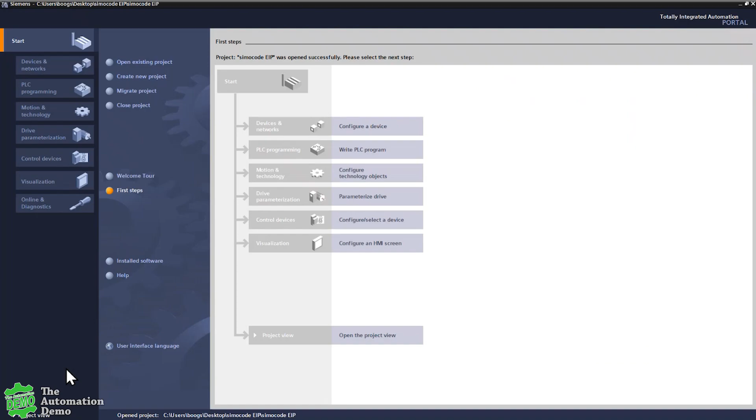This is TIA Portal, and this is the software that we program with. As I said in the previous presentation, the portal is my umbrella that covers all the programming aspects of PLCs, HMIs, and drives. I've already added a SIMOCODE into this project, but just to show how you add one, you go to New Device, and as I stated, here's your PLCs, your HMIs, your SCADA systems, your drives, and then here is my control devices.

The software, as we stated previous episode, is free for the basic. If you are not programming any of this other stuff, then this is what would show up. But if you're using our PLCs and you want to use SIMOCODE, this would be the little postage stamp for that. And then it will be under SIRIUS Monitoring Control Devices. And then here's the SIMOCODE Pro and the basic unit, because that's what we will talk to. And then here's all the communication protocols that we have.

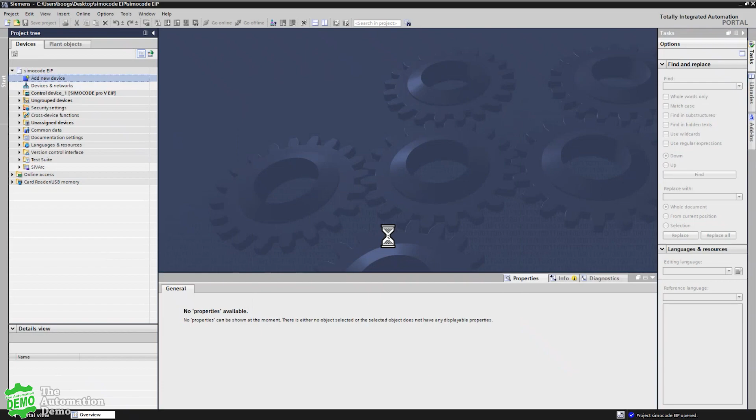For our demonstration right now, I'm going to use Ethernet IP. And I'm going to hit OK. And then what it's going to do is start a wizard for you. Because the SIMOCODE, yeah, it has some complexity to it. We want to make it easy for you. So what we do is initially out of the gate, we create or start a template startup screen. And we're going to do the parameter wizard.

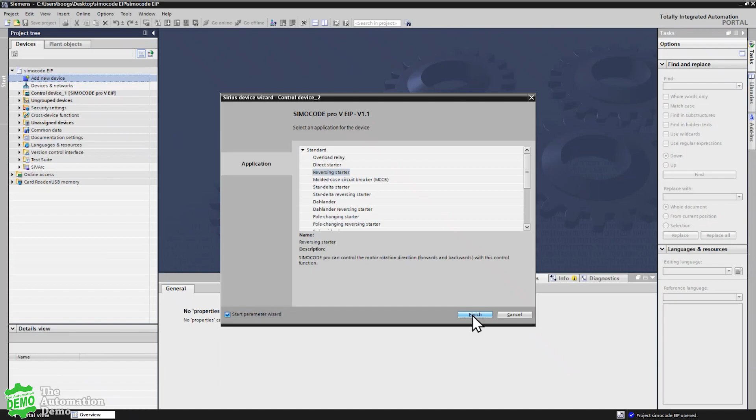And then it says, how do you want to apply it? How do you want to use it? Overload relay, direct starter, or reversing starter? So in my application, I'm going to do reversing starter. And I'm going to hit finish. And then now it just installed a template into the SIMOCODE of how you want to use it. And then here again, it says, are you sure you want to use it as reversing starter?

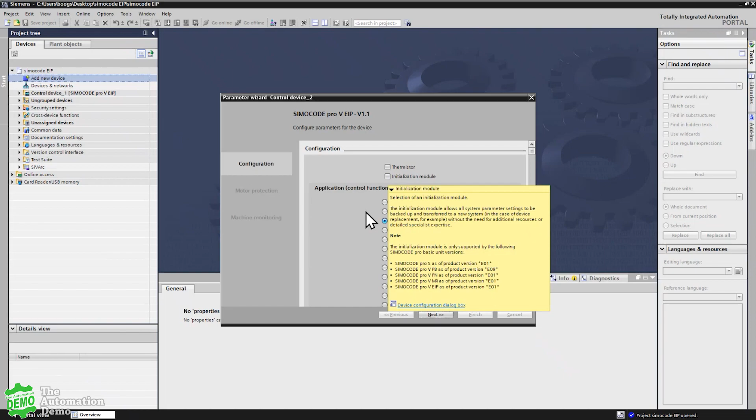And then it has some check boxes, thermistor, if you're going to use the thermistor in the windings. And then there's the initialization module that we talked about, one way of recovering or programming a new SIMOCODE that you swapped out. I'm going to hit next. Here's where I put in my full load amps of my motor. And for my application, it's 0.5 amp.

And then trip class 5, 20, see it goes all the way to 40. For my application, I'm going to go 20. And then cool down period. This is the time that you rest after an overload trip. I'm going to put in 60 seconds. That's the minimum. And then you can see here's an unbalanced protection and then a stalled rotor. But notice it's deactivated. All the settings that I talk about today are all deactivated, except the application that you've done is for an overload and using it as a reversing starter.

So I hit next. And then, as I stated in the previous episode, I have a way of doing high and low, and setting that up within the SIMOCODE to where it could stand alone by itself. So if you're using a SIMOCODE by itself in a pump panel and you want to have a high and low process window, this has nothing to do with the overload, but a process window for pressure, and we bring it in as a 4 to 20 milliamp pressure, then I can set this up as a process window.

And you're able to control and give signals to let them know if it overpressures or underpressures, like for instance, my friend where his pivot broke and a flange or a coupler broke and was spraying water everywhere. So the demand for the pump went extremely high, but the load went away. So I was able to shut it off before it flooded his fields and so forth.

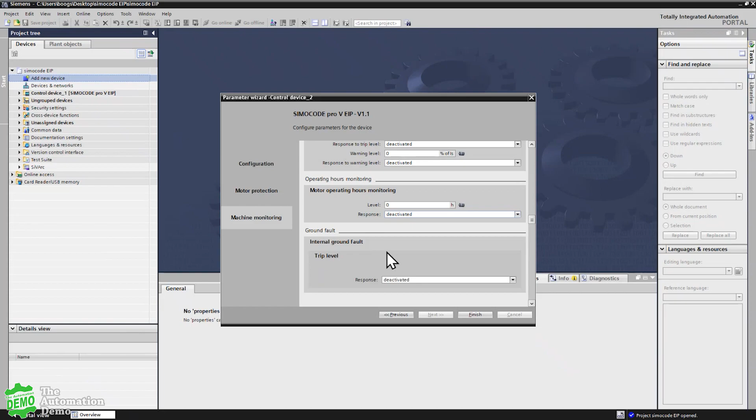And then we have some other options here where you have motor operating hours. So you can go in here and put in 600 hours, and then you can send a signal to the operator and say, hey, once the motor has run accumulatively 600 hours, signal him, and then he can fill out a PM and schedule it down or let the maintenance department know that the motor has run for 600 hours. And that's a way of doing your PMs on motors instead of like a calendar or anything like that. But we're not going to do that today. But notice it's deactivated and it's waiting there for you if you'd like to use it. Then I'm going to hit finish.

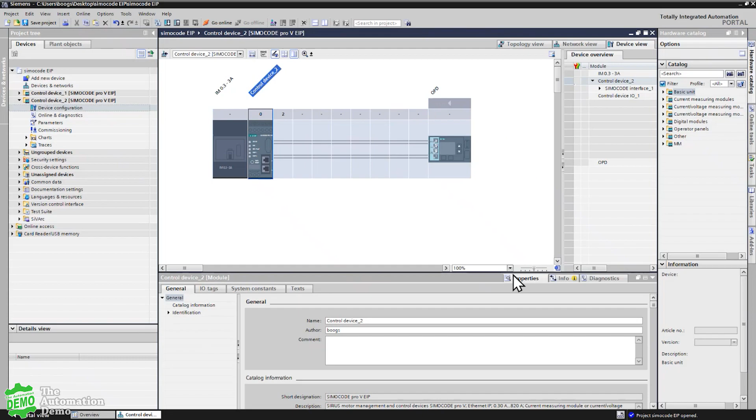Now what it's done is we're practically finished and using it. But when it adds it to the project tree here, I'm going to go to device configuration because we haven't told it what it all can do. It does a bare minimum of doing a current draw. And let me zoom in a little bit. So right now we only have a CT. But let's say our customer wants to monitor voltage and current.

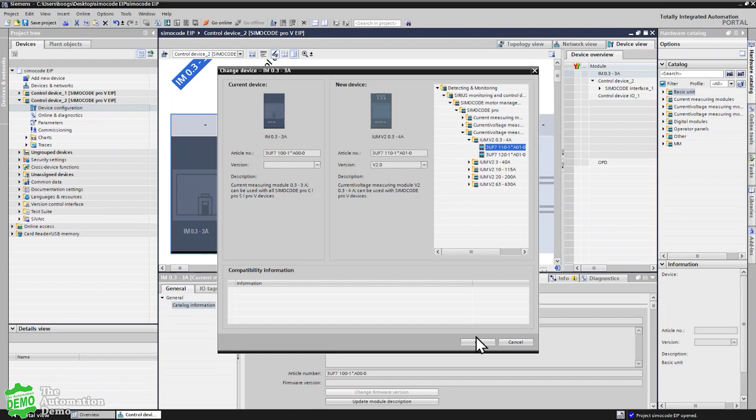So I'm going to change the device, and I'm going to change it to a CT PT so that it monitors current and voltage, and hit OK. And notice that the 0.3 to 4 amp on this one's just 0.3 to 3 amps. We'll switch that out. And now you have L1, L2, and L3 for monitoring voltage. You have the EtherNet/IP SIMOCODE.

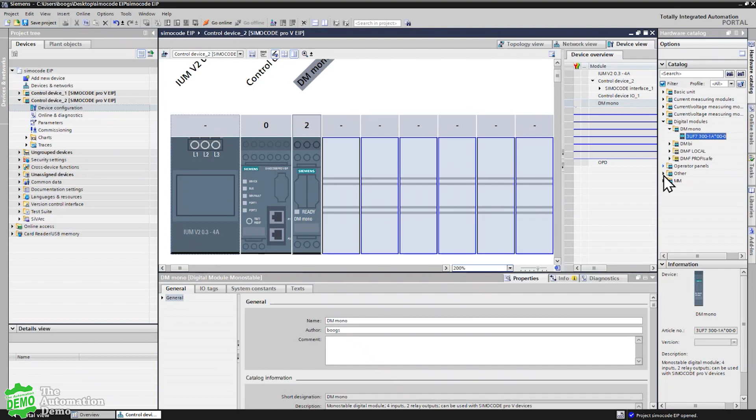And then in my demo that I'll show in just a minute, we're going to have a digital module. I stated that some plants use 120 volt control, and that's where we would use this digital module, because the base unit only has 24 volt DC inputs, but this one has 120 volt AC inputs. And then I'm going to put in an analog module and put in a temperature module. So now I've built up my demo that I have here on the desk.

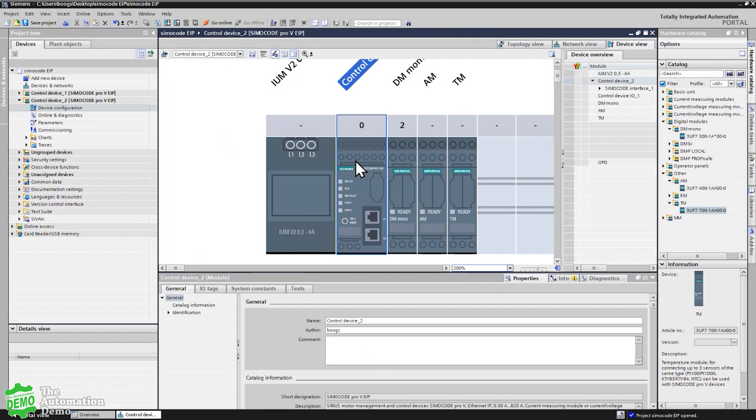I have the operator panel. If you don't, it's not required. If you're not going to use it, you can just delete it. Or if you want to leave it there, you can use it. That's great. So the last thing I need to do, because I've already got it configured as a full voltage reversing, I'm going to come to parameters again. And note, for those who've used Portal, the same icons, the same terminology, and the same look and feel as our drives. This is what the icons are for our G120 series or our S120 series.

I'm going to come over here and go to Ethernet parameters. I'm going to put in 20. If you remember, when I did the configuration in Studio 5000, I used 192.168.1.20. And then I'm going to scroll down and I'm going to turn on the web server. The web server meaning the web page for the SIMOCODE.

Now there's one big difference between the EtherNet/IP and the Profinet, Sean. The Profinet one has an OPC UA server built in. The EtherNet/IP does not. That's the big difference. But the setup and configuration of the EtherNet/IP version or the Profinet version is exactly the same. The only things that really change are that there's no OPC UA server here, and also the communication protocol.

So now, you asked me about the bits and the bytes in the logic. So if you look here, this is where it comes into the logic. With Siemens, we call it cyclic data, where it's cyclically sending and updating the process image. And then we have acyclic data. And correct me if I'm wrong on my terminology, Sean, but for Allen Bradley, that would be implicit and explicit data. So this is the implicit data that's coming into the Rockwell.

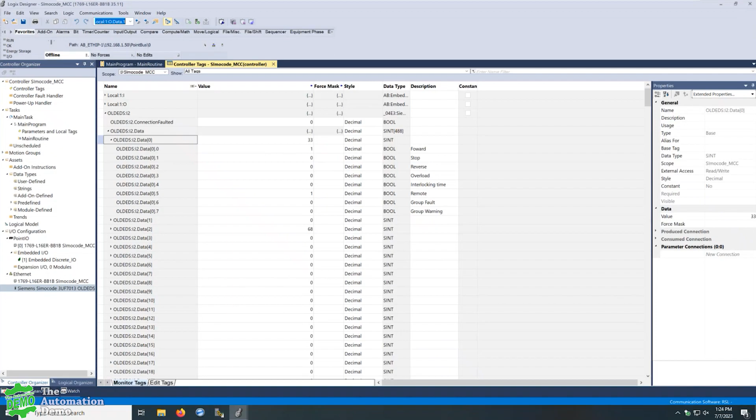So bit 0, that's status clockwise or counterclockwise. Bit 1 is off, bit 2 is counterclockwise. So if I switch back to the Rockwell software, you can see bit 0, there's forward, stop here, and notice that it's byte 0. And then here's reverse, and then I continue to do remote, ground fault, or group fault, and group warning, which is coinciding with this here. Okay, so with that done, that's the setup. You download it to the SIMOCODE, and we're off to the races.

Now, what I want to show next is how we go about turning it on and off. Mark, can you please do me a favor? Could you please check the IP address in Studio 5000? I'd be glad to. I believe it was 1.20 here. Yes, it was 1.20. Now this is the second one you added, though. That is correct. The one that is downloaded already is right here, and its parameters are the 1.20. Oh, I see. You were just adding a second one to show people how to go through the steps. Exactly. But the one we're actually using is the 1.20.

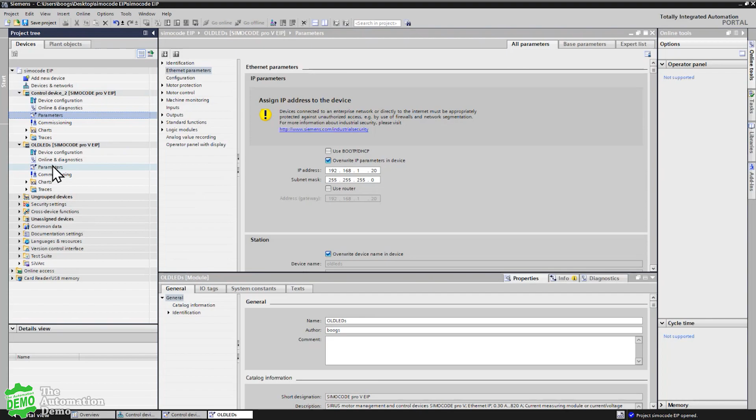Got it. Yep, this one up here, and I can change the name so it matches the one that I put in. So I can call that pump 203. Or the one that was in the Rockwell was old LEDs, like that, so I can have it match that. And now you can see it put it in alphabetical order and moved it down here. Okay, good. So the purpose here was to show you how to import it, but I've already done it here. I've already downloaded it to the demo that we're having.

So I'm going to switch over here to the Rockwell software. I'm going to go over here to the main program, the routine, and you can see up here that I have,

Can you zoom in on that? Thank you. Yep. For the old guys like me. Yep, I'm with you. I'm wearing my glasses as we speak.

So there we go. So I've got now the remote data, meaning is that I'm doing a local data. I've got a selector switch, and I'm going to put it in. So for our terminology today, remote means that the DCS or the PLC is in charge. And then local means that the demo is, or maybe a local stop start at an MCC bucket or a stop start station at the motor.

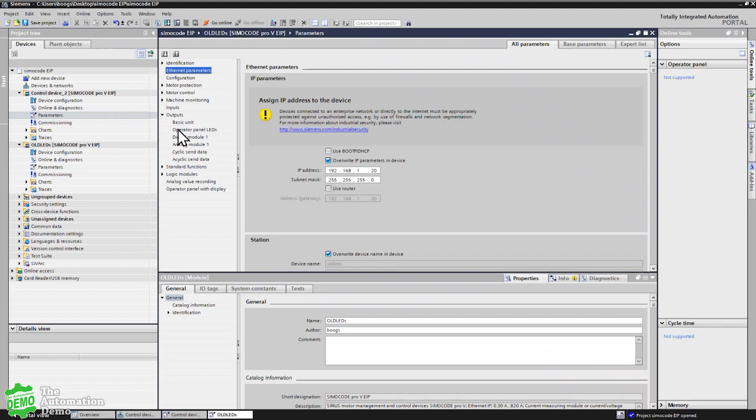So then that bit 5 gets turned on, which if you look at the Siemens software, that bit 5 right here is remote mode. So I'm turning that bit high to remote mode. All of this was programmed when we did the template of the full voltage reversing starter. This was all programmed for you.

But also notice that you have some free bits and bytes that you can go in and have do whatever you want and communicate it over to the Rockwell PLC. For instance, let's say that you're using a temperature, we can send bits and bytes for a warning that the gearbox is reaching too hot of a temperature. Or in this case, I put an execution stop command, which means that I told the motor to stop

running, but I'm continuing to see current flowing, which means that maybe I have one leg of my contactor welded shut. And so then that can let the operator know that the reason why the motor hasn't stopped is that we may have one of the legs of L1, L2, and L3 of a contactor welded shut. So this is a free pad, kind of free wheelie, of changing the bits and the bytes in byte 1 to whatever you want to bring across to the ControlLogix 5000.

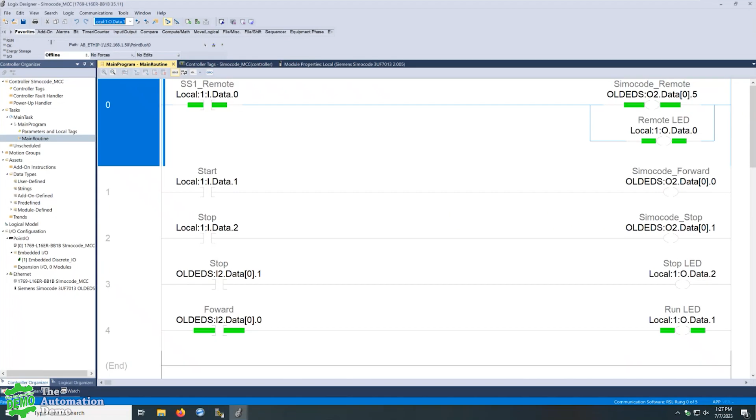So I'm going to stop sharing and I'm going to show the demo. And it's set up. And then I will come over and operate it a little bit. So right now I have an operator station. And you can see that I've got stop, counterclockwise, clockwise buttons. I have the SIMOCODE basic unit, the CT module that's measuring the current and voltage. And then I have my circuit protection up here. Right now that's just an MSP. And then down below I have a reversing contactor.

So right now it's in charge of the local, so I can start it. I have my motor turning. I can stop it. You can hear a little bit of noise of the motor contactor pulling in. But notice over here as I'm stopping and starting, the lights are changing on the CompactLogix. That's because we're communicating over, letting them know status. But notice that I cannot stop or start with the CompactLogix until I tell it that I want to be in charge. The blue light means that it's in remote mode.

And now I'm running it via the CompactLogix. And I can stop it. And then I can relinquish control again. Light goes off, meaning that I'm local again, and so forth. So that's the gist of it all, the communications for the Ethernet IP.

So now, if you don't mind, Sean, I'm going to switch from Ethernet IP and show you communicating with the Siemens PLC. I won't download it, but I wanted to show you what it takes to communicate with a Siemens PLC. Yeah, excellent. Please. Okay, so we'll switch back over to TIA Portal. All right, return back to the TIA Portal software.

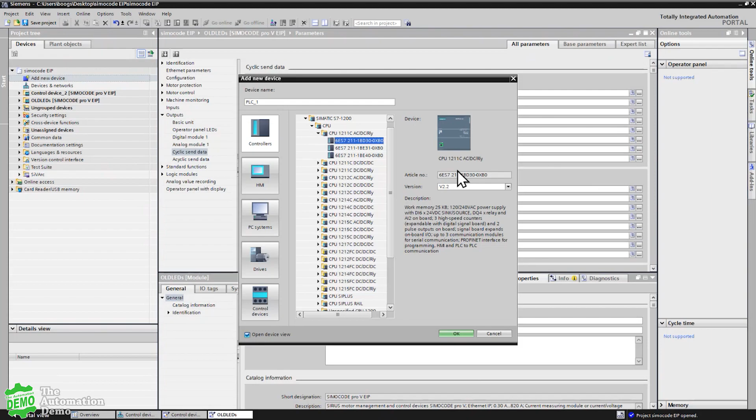Now notice I have two SIMOCODE Ethernet IPs in here. Of course, we're switching now to full Siemens. So I'm going to quickly add a small PLC, maybe our smallest one. We'll just go to a little 1211. And this one's, if I remember right, 6 in and 4 out. And I'm going to hit OK. And I'm going to add that to my entire project.

That's the power of TIA Portal. I can put as many PLCs, HMIs, drives, SIMOCODEs in this and be able to look at my entire plant or make it a simple project as one PLC and one HMI.

I would just caution the audience that it's great to have a tiny PLC like this that programs just like the big ones, especially just like the S7-1500. Notice on the right-hand side, there's no expansion slots. So keep that in mind. If you ever pick the 1211, keep that in mind. You're getting what you're getting, and that's all you get, except for the little board on the top.

That's exactly right. The little signal board here, and that's about it. The 1211 is just a quick small little guy. It's on the verge of being a smart relay is what it is on the 1211. But you move up into the higher 1200 series, then you're able to expand as much as you want. A lot. Yep. And if you look, you can tell that it's not going to allow you to expand because you have none of the rack over here. It's dead. There's nothing here. Exactly. So that lets you know.

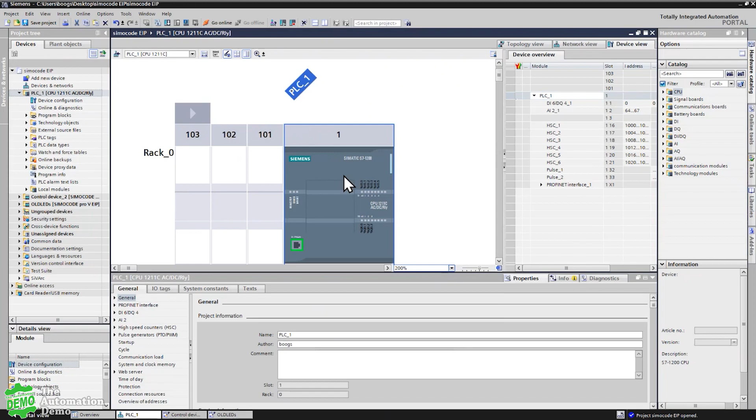But my purpose in showing you is that the smallest little PLC can control via Profinet some good stuff. So now I'm going to switch to network view and show you what I have out there. Notice that the Ethernet IP SIMOCODEs are up here. So I'm going to move them down and I'm going to move our PLC over here. Now I'm going to add a Profinet version of SIMOCODE. So add new device.

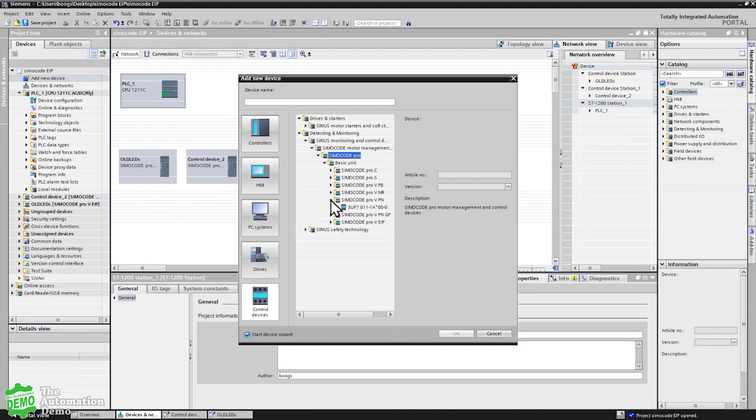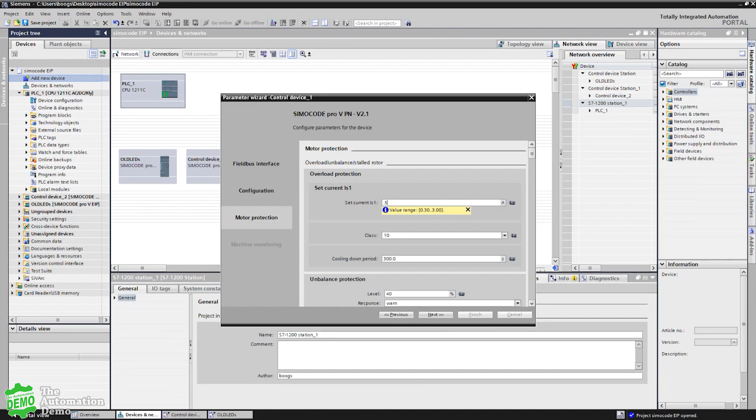Go here, basic, and then I'm going to go here to Profinet, go to this guy, hit OK, and the same steps. So it's the same look and feel for both Ethernet IP and Profinet. And this one, do reversing, and hit finish, and go next. It's asking you sure you want to do this. Yeah, hit next. Here's the same screen, adding my full load amps. We'll drop this down 20.

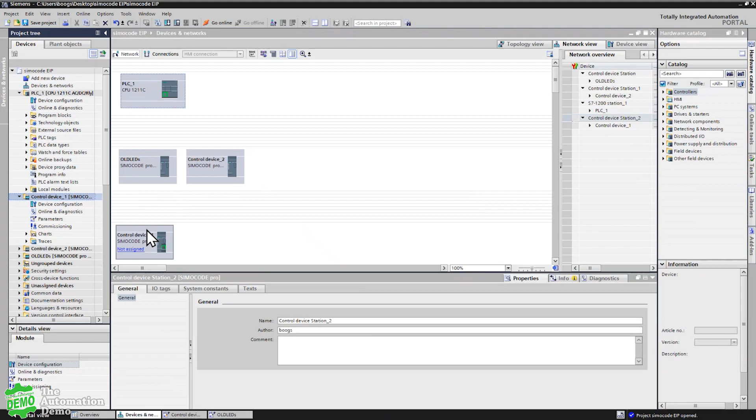And if this looks redundant, it kind of is because I'm doing the same settings as I did in the Ethernet IP. Hit next. Here's your process window, your high and your low, but we're not going to do that right now. And then here's your motor operating hours. I'll hit finish and notice that it added it here. So I'm going to come here and double click and then come right here. And now again, this is the current only monitoring.

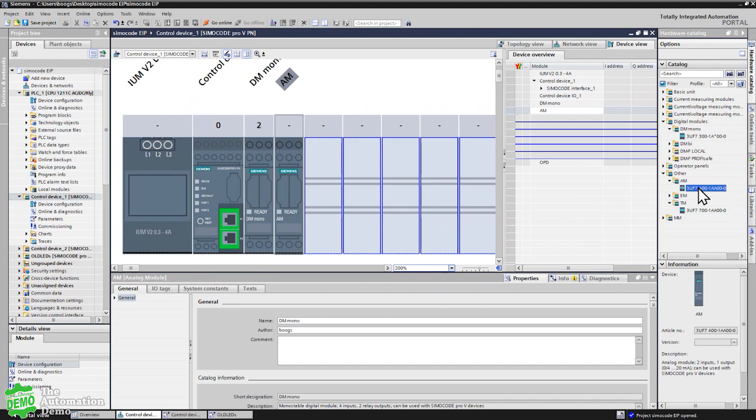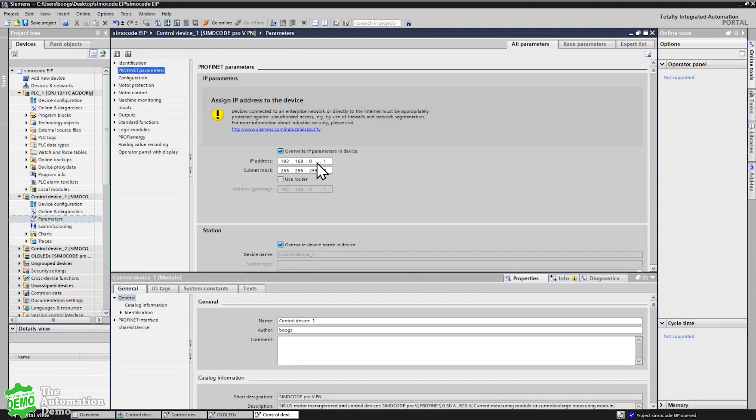I'm going to switch that to voltage and current monitoring. Hit OK. And then I'll add the same items as I did in the Ethernet IP setup. So I come here for the digital module, analog module, temperature module, and I leave the operator panel right there. And then now I go over to parameters. And we'll make this Profinet parameters, and we'll make this 161, and go here and make it 21.

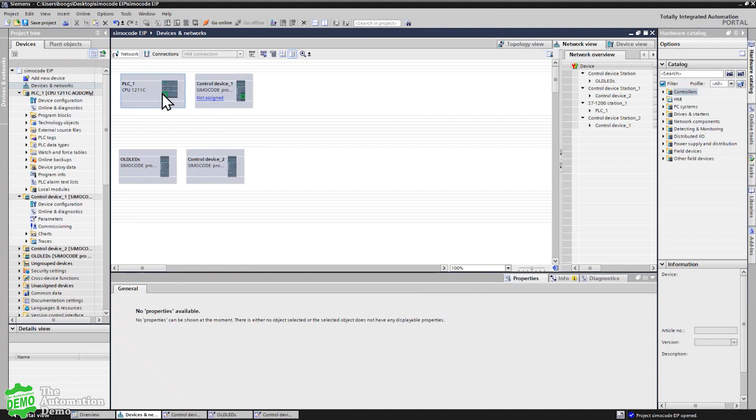And then scroll down, and now I'm going to turn on the web server and the OPC-UA server. So as you stated earlier, the Profinet has an OPC-UA server built in. So this can talk directly to your SCADA systems or directly to a historian without going through the control system, and then the web server. And I'll demonstrate the web here in just a minute. So now that that's done, I come over here to my networks. I tell it that I want to talk to this PLC. Now it's talking to that PLC.

Now what I'm going to do is go to the PLC. Now I'm calling upon some old days when I was a controls engineer. I had about a 35 motor project. And with those 35 motors, I had to do the stop, the start, had to build up all the tags and tie them to the real world IO. And they were pretty much the same thing, stop, start, fault, e-stop, so on and so forth. But that was for 35. So it took me a little bit of time building that up into the tag display.

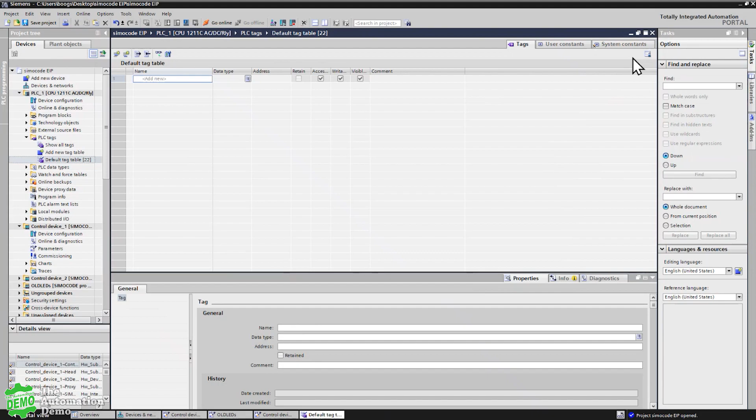But let me show you the power of TIA Portal when you use Profinet. Notice this is the tag display. So I'm going to kind of loosen that guy up here, bring him over. I'm going to go to SIMOCODE, and here's the SIMOCODE. And then I'm going to come down here to IO addressing, and then I'm going to say create PLC tags.

Okay. And once I hit the create PLC tags, the tags are automatically generated. Now that's the bomb. That's a geek spasm right there, Sean. That is such a huge time saver.

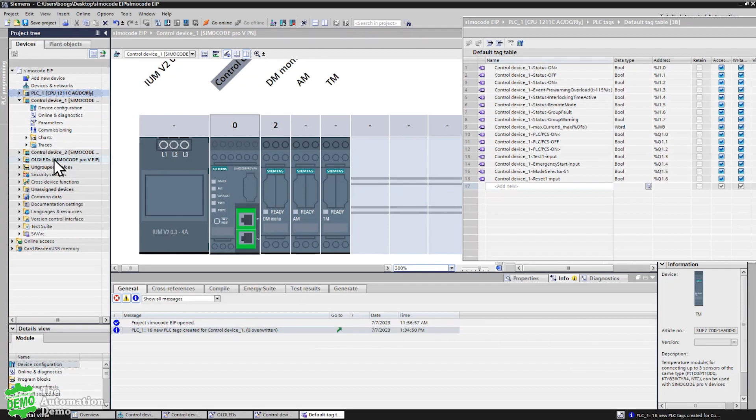Yeah, absolutely. And so if I got 30 of these SIMOCODEs, I go to the next one, right click and say... but now where did these tags come from? Where did they come from to be created? So I come here to control device. Oops, sorry, pardon me. I come here to the SIMOCODE Profinet. Let me open this up a little bit. Sorry. Yeah, I think it's control device 1.

Yep, thank you. And I come to parameters. And I go to outputs, and I go here to cyclic send. And now I will line that up. So now you can see exactly where that came from. So there's your on, off, off.

Now what happens if later down the road, you say, hey, I want to add a tag, and we're going to go, let's do that execution stop command that I was talking about, what this does. So I told it to execute a stop, but it continued to have current flowing. I want to add that tag. So I hit OK. Now notice it didn't instantly put it here.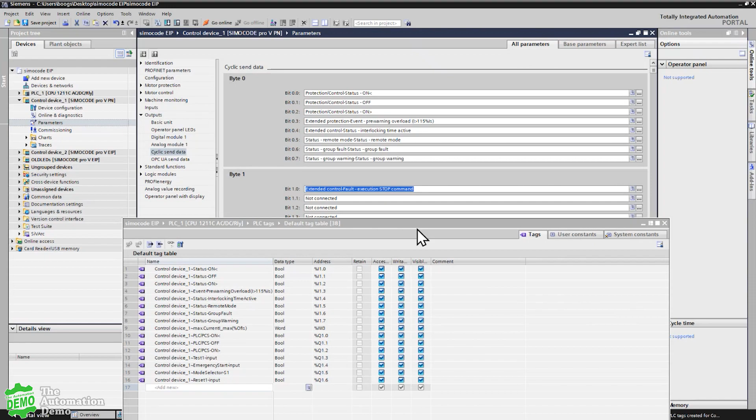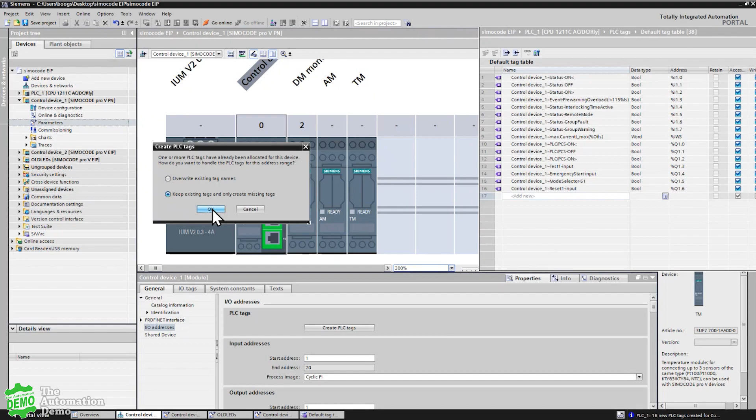What I have to do is I got to go back to the SIMOCODE and say create PLC tags. Now it's going to bring up a little box that says, do you want to overwrite the existing ones or do you want to keep them and just add the ones that are missing? I want to keep them and add the one that's missing. And there it is, done.

Yep. So that's a little geek spasm for me, but I can't believe the time savings on that. And that's the power of using TIA Portal with the one database, being able to pull in, create tags. Now, FYI, the tag generation also works with our soft starters the same way. And that's about it for it.

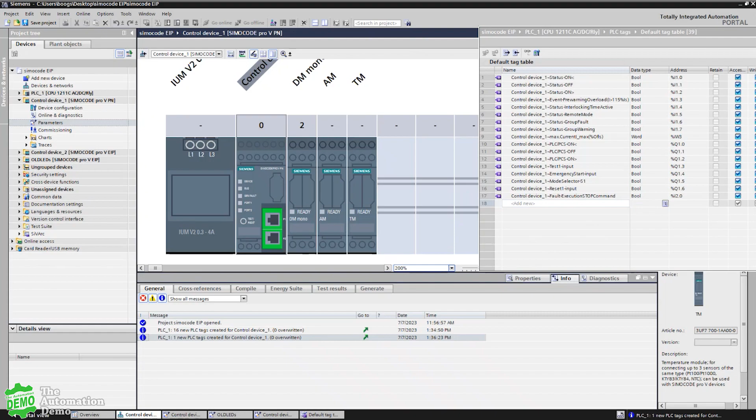Let me show you now the web page. So now I've gone in here. Here is the web page. I've typed in 192.168.1.20 and I'm communicating to the Ethernet IP version. Hit enter. And we enter in here. Now with the web page, I have devices okay, buses okay, the PLC DCS is in run mode, and then I'm off. So, as I did earlier, I can start it. And now I have an on, start is active.

Here's my phase sequence. Here's my faults. And this is where it'll list the 21 faults time and date stamped, or sorry, pardon me, this will give you the digital inputs letting you know if there's any faults out there. But then I can come here to the error buffer, and this is where it'll show me the 21 faults, time and date stamped.

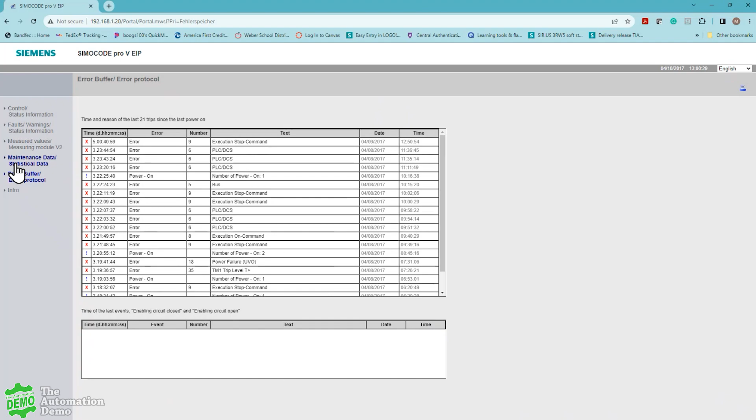Then I have my maintenance and statistics data, and this is where you can get some of your OEE calculations. So for instance, it's going to show me down here, my demo device has been running for 145 hours, and my motor is operating at 4 hours. So if that pump is not running, I'm not making money. So help me understand and justify the delta between operating hours of the SIMOCODE, meaning powered up, versus the motor running. And then here's the number of overload trips. Here's the number of starts.

So let's say we have a NEMA starter and we know that we need to rebuild the contactors. We can go look and do an approximation: after 500 starts, or 600 starts, we need to go buy a new rebuild kit for the NEMA starter to rebuild the contactors. So we can start getting some run rate data with the SIMOCODE. Instead of having a failure in the field and everybody running around trying to get things going, we can do some predictive maintenance with this type of number of starts and so forth.

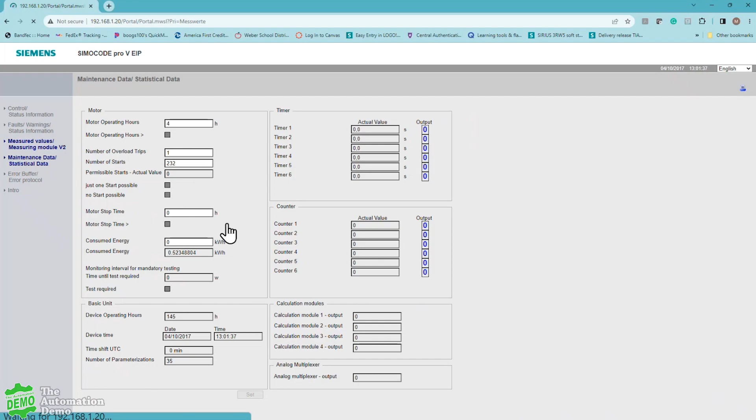So here's your kilowatt hours. And then we can look at some measured values. And this is all the website. And all this is just a checkbox in the configuration of the SIMOCODE, both Ethernet IP and Profinet. So here's your voltage. Here's my current flowing. We could mess with the current a little bit. I've got some potentiometers. I can change up the voltage a little bit.

And then notice too that I have an RTD module. So now I have a max temperature of 33 degrees. I'll drop this into the palm of my hand here and see if we can get it to raise up in temperature. There it goes. Takes a couple minutes.

I am a little cold-blooded. Only kidding, only kidding. Yeah, I know.

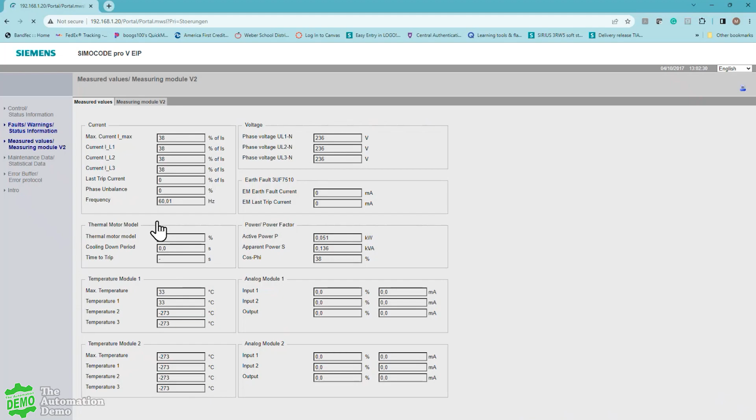But here's your apparent power. Here's your active power. And then again, your faults. Just in case the audience hasn't noticed, that was in C, not Fahrenheit. Yep, it is in C, and unfortunately I can't turn it to Fahrenheit. It's hard coded as C. And then I have the warnings. So then here's the warning table letting you know we're coming up on something, and then status information. Lots of stuff. And then the control status.

Well, I think we've shown enough stuff this time around. I hope this has been pretty enlightening for what SIMOCODE can do, talking to both PLC platforms and giving you the data that you need out there. And Sean, thank you so much for allowing me to do this today.

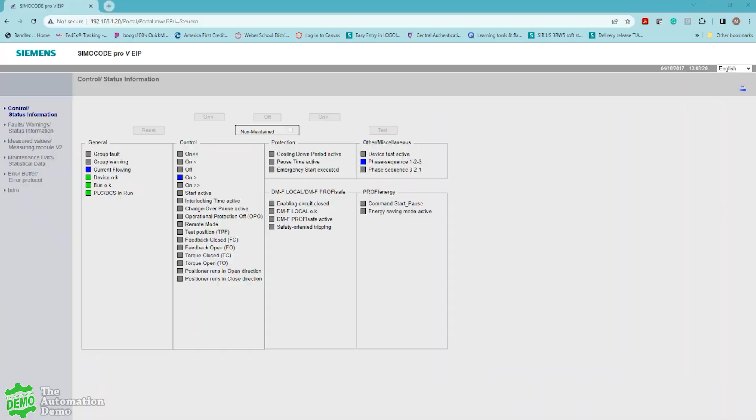Yeah, you can definitely tell that adding it to the Siemens is just like, boom, it's all there, you generate tags. But I gotta say, adding it to the Rockwell was not that hard either. I mean, you just input a couple of files, which you do with really any third-party device, and it was good to go. So, no, I really appreciate you coming back on. The presentation, going through the product features was good, but it was great to come back on and do this part too, and actually see you use this device with both Rockwell and Siemens PLCs.

And I'm assuming you probably could use it with other PLCs as well, as long as they talk Profinet or they talk Ethernet IP. But I've heard a lot of rumors out there that a lot of these electronic overloads are back ordered. How about you guys? Do you have these in stock, or are they long lead time? Lead time is relative. Right now, the majority of our parts are within a week or so.

We do have a couple of our CTs that are out about a month, not because of shortages of materials, but because of overwhelming orders. Right now we're about a month out on the 10 to 100 CT range and the 20 to 200 CT range. But the SIMOCODEs themselves are on the shelf, ready to go, and all the digital modules and cables are ready there too. We just have two items, the CTs, that are a little bit longer out, about a month. Okay, great. Other than that, it's just due to popularity, and we're trying to catch up with the orders that we have right now.

One last item before I say goodbye, I failed to mention that as well as the EDS files and the UDTs, we also have an AOI for the SIMOCODE for you Rockwell users. Oh, all right. Excellent. Yeah, that would save you even more, make it even easier for you.